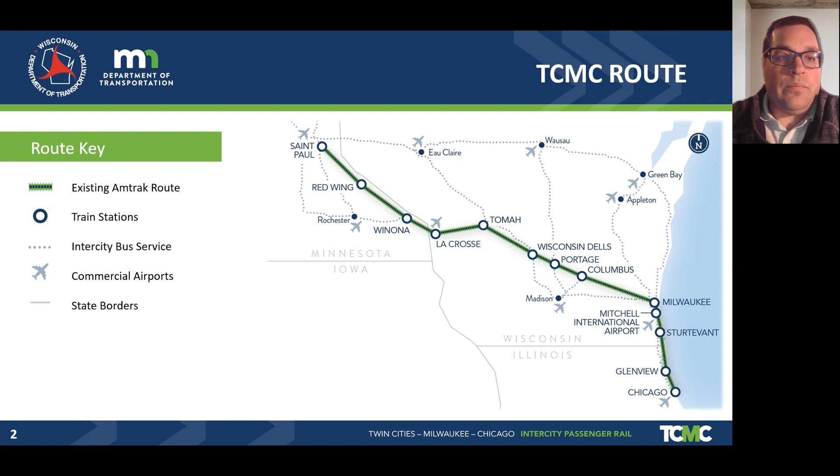So what are some of the features and benefits of the TCMC project? This will be looking to add an additional round trip within the corridor between Chicago, Milwaukee, and the Twin Cities. This is along the existing Amtrak Empire Builder service and the Hiawatha service.

The overall corridor is about 411 miles. It will be operating at a max authorized speed of 79 miles per hour. The schedule that has been developed will allow for both morning and midday departures from each end of the corridor. And as I alluded to on the previous map, all existing stations within the corridor will continue to receive service as part of the TCMC.

Some of the benefits associated with this project are additional job growth within this corridor, with the ability of additional rail service allowing users to travel between multiple destinations. Along with that will be additional economic development, bringing in additional businesses into the corridor.

One of the key features of the project will be reduced freight delays, with increased fluidity between both freight meets and passenger meets. This is going to reduce congestion, and as an outcome of that we're going to see crossing downtimes being reduced throughout the project. This project will also address some of the safety concerns at the at-grade crossings in multiple locations where we're doing work.

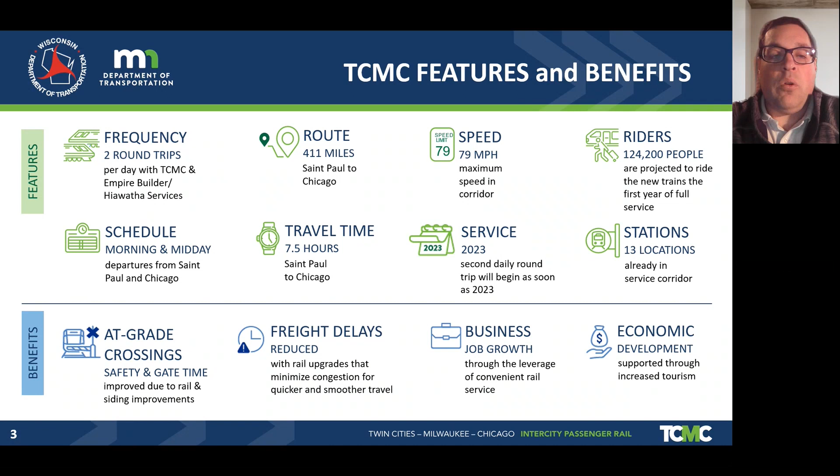So let's talk a little bit about the project timeline for the TCMC project. This is a project that started back in January of 2015. We have already completed a majority of the planning process up to this point. In this final design phase, we are working on the engineering component to prepare final design plans to allow a contractor to go out and build the various components of the project.

On the top bar, we show where we are right now, doing the final design components as well as the environmental permitting clearances for all the construction activities. The next bar closer to the bottom is the public involvement. We are here doing our public involvement outreach now in the winter of 2022. There will be additional public involvement happening in the first and second quarters of 2023.

On the bottom right-hand corner, we show where construction can begin. Construction could potentially begin as early as July of 2023, looking at doing some early material ordering and coordination with the CP Railway on several of the elements that they will be doing themselves up and down the corridor. Construction is tentatively scheduled to be concluded by 2025.

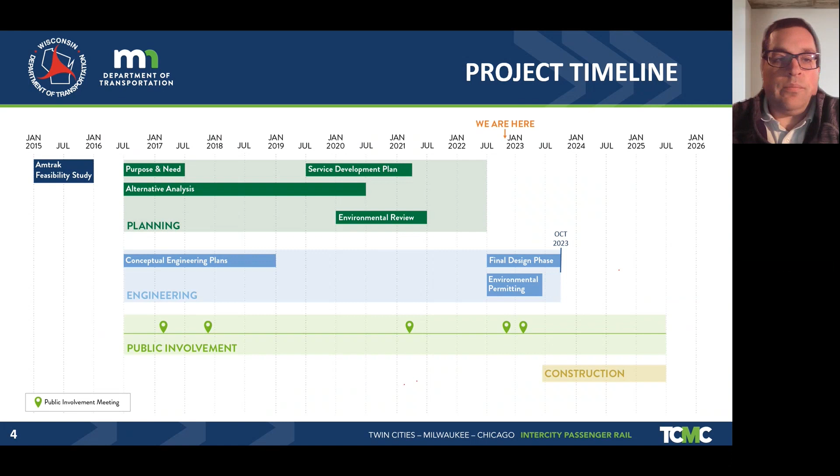So let's look at some of the areas of improvement that we'll be looking at. A majority of the improvements are concentrated around the La Crosse, La Crescent, and Winona area. This was identified as a very congested part of the overall corridor. There are 5 primary projects that we'll be talking about.

There is a double track project in La Crosse directly adjacent to the depot. Directly on the west side of the river is a project called the Mississippi River Bridge, which will be looking at track reconfiguration for the approaches. River Junction is an existing yard that will be doing some additional track work to help with fluidity in the overall corridor. And then in Winona there are 2 projects: one is upgrading an existing siding, and then doing some track reconfiguration at an existing control point called Tower CK.

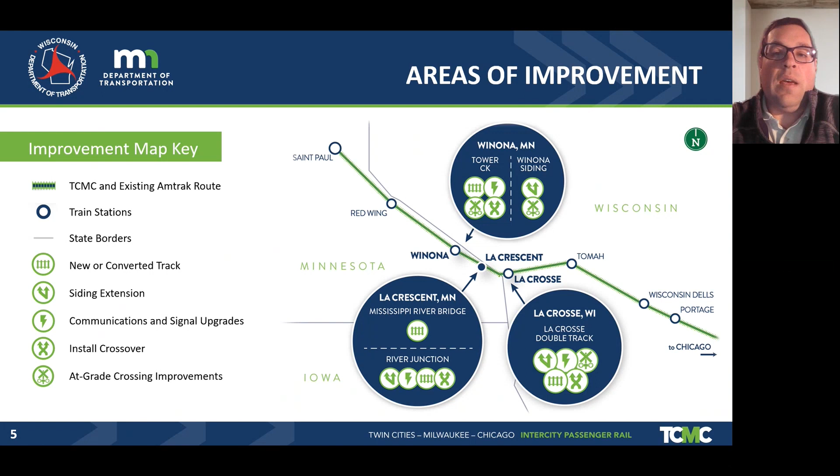So we're going to talk about each of the projects individually, and we're going to start on the east end of the corridor in La Crosse and work our way to the west. The La Crosse project area is highlighted on your screen here in orange.

The primary component of this project is looking to reestablish the double track section through this limit between the yard on the east limits and the bridge over the Mississippi River on the west end. We'll be adding additional tracks, reconstructing the existing platform. There is a historic awning at the depot itself that will not be impacted as part of this project.

Another key component of this project will be doing at-grade crossing work at 2 crossings on the very east end, St. Cloud and Liberty Street and Avon and Hagar Street. With the additional track going through these crossings, we'll be redoing the approaches and adjusting the at-grade warning devices at these locations.

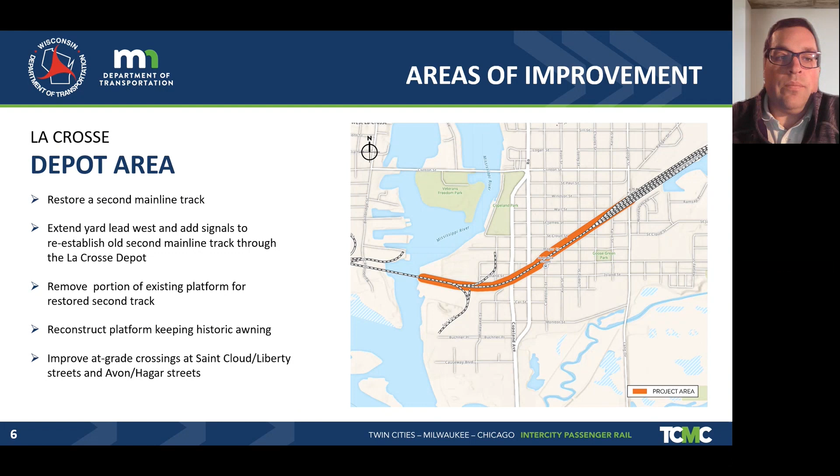Directly west across the river is the Mississippi River Bridge project. We'll be reconfiguring the track curve approaches here, allowing for increased speeds across the bridge. Directly on the bridge itself, we'll be upgrading some of the special track work components, allowing for that speed.

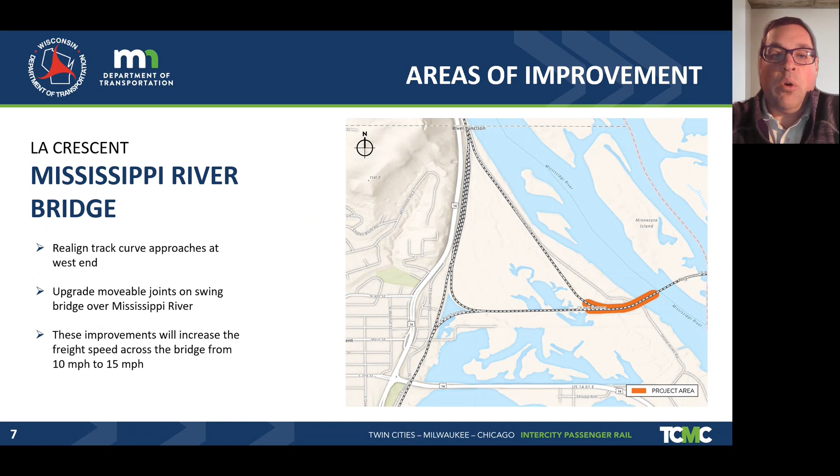And the pace that we'll be achieving with this project will be increasing the speed across the Mississippi River bridges from 10 miles an hour to 15 miles an hour. This 5-mile increase really helps with the congestion and the fluidity in the overall network related to both freight and passenger trains.

Just a short distance away, further to the west, is what we call the River Junction Yard project. This will be a project to add a second mainline track to allow increased speeds. On the very top of the page is the junction called River Junction, a control point that connects 2 subdivisions, the Marquette subdivision and the Tomah subdivision, where they converge.

We'll be modifying the wye track there highlighted in orange to allow increased speeds of 25 miles an hour, and then reconfiguring the lead tracks into the yards and turnouts to allow freight trains to get off the mainline tracks and allow passenger trains to pass within the corridor.

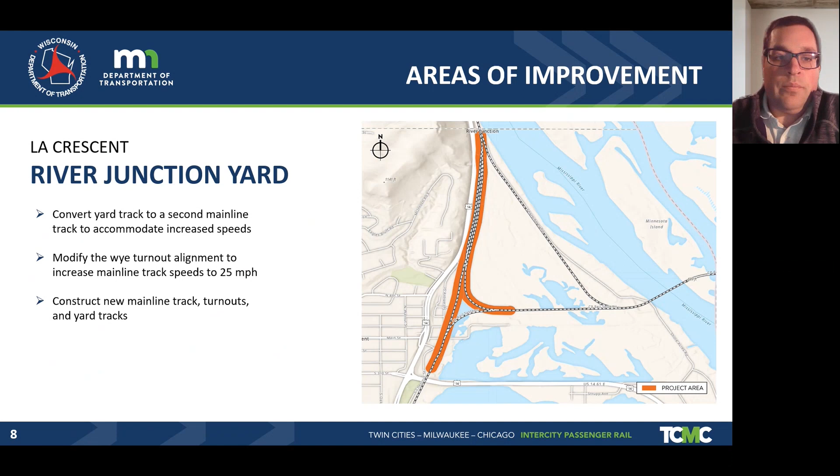Heading further to the north, the first project that we're going to discuss in the Winona area is called the Winona Siding. This location is an existing siding track that we'll be powering up. We'll be adding new wayside signals at each end of the existing siding and replacing the turnouts with new number 15 turnouts. This will allow the siding to be utilized from a remote dispatcher for passes and meets between freight and passenger trains.

We'll have multiple at-grade crossing upgrades throughout this siding, looking at replacing crossing surfaces and upgrading warning devices.

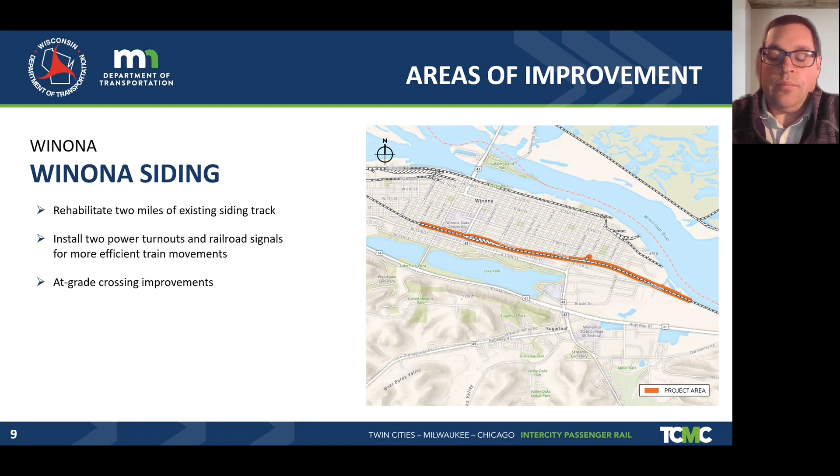The last project in Winona and for the TCMC project is the project called Tower CK. We'll be connecting the mainline track with the CPR Waseca subdivision on the left-hand side of the orange limits. We'll be adding power switches. This will allow for multiple railroads that operate in this location to be able to switch, pass, and meet all in this location.

It really helps with the conflicts and the ability to keep the corridor moving fluid and keeping passenger trains and freight trains from meeting there at the Winona station. Another key component of this location will be the Bierce Street at-grade crossing. We'll be looking at doing an upgrade there with the approaches and the warning devices and smoothing out that at-grade crossing.

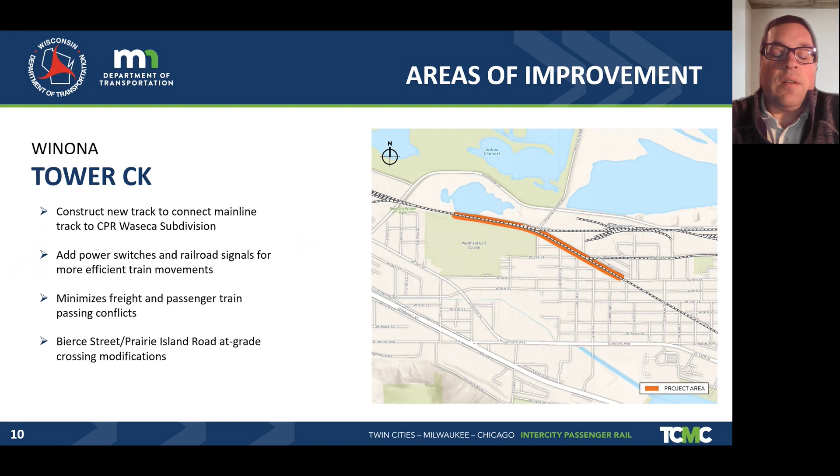So what are some of the next steps that we'll be doing? Right now we're in the public meeting and comment section here in winter of 2022. As I alluded to in the prior slides, we'll be doing additional outreach in spring of 2023, first and second quarters. We're on schedule right now to complete the final design phase in summer of 2023, with the anticipation of starting construction as soon as 2024.